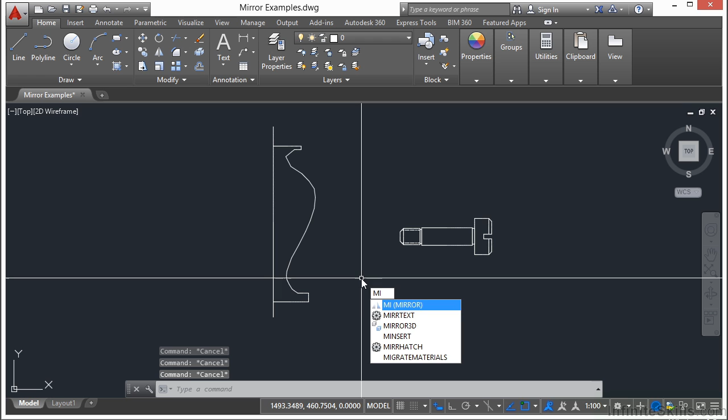So we need to start the mirror command before we can get going. Type in the word mirror, or you can type in the letters MI. Not just the letter M, which is the move command. So we want MI for mirror. Then you can come up to the Home tab on the ribbon, go to the Modify panel, and then go to the mirror command to start it.

Select your objects. We're going to select this half of the vase. You can pick one object or multiple objects. Press return, and now you have to create a mirror line. We have to pick 2 points. These points will create this imaginary line that your objects are going to be mirrored on.

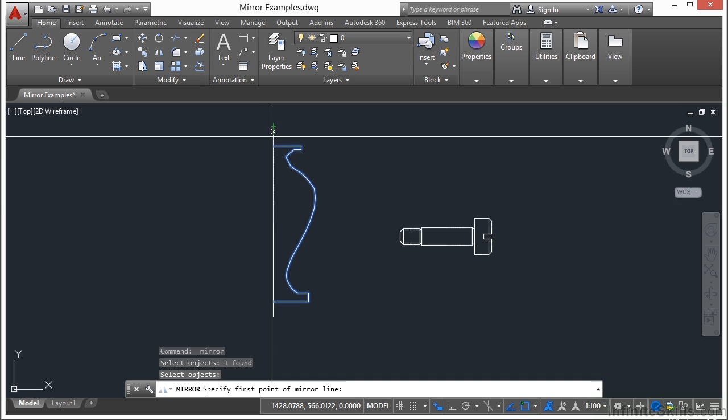In the case of the vase, I've put a construction line drawn in here already to help us see what we're doing. But you don't have to have a physical line drawn in there. Sometimes, though, it does help you get a better understanding of the process and to help better define exactly where you need to mirror about.

So in this case, I'm going to start off by selecting the top of the line. And as you can see here, I have a bit of a preview, and you can kind of see how this is all going to come into place. So I have my mirror line, which is that dash line. I just have to pick a second point.

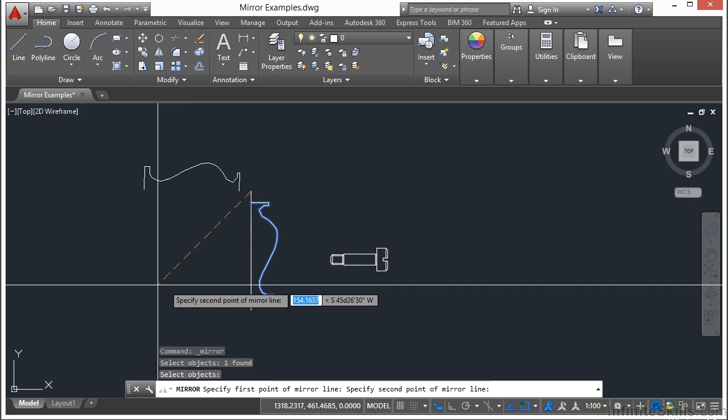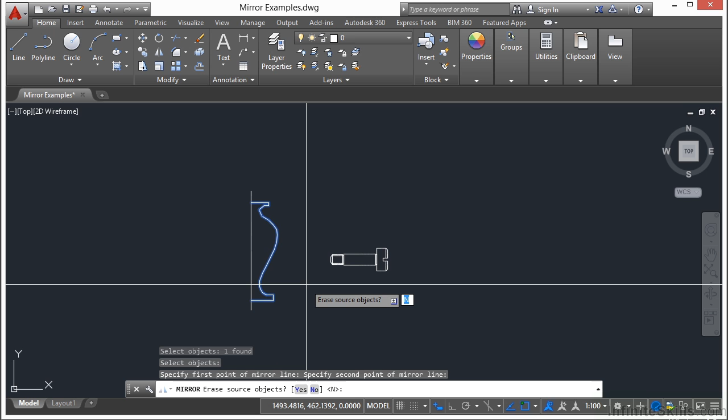You can use the mirror command to be a sort of a rotate command in a way, and I've done that before. With this little preview, I'm going to now pick somewhere else along this line. And now you're given an option: if I want to erase the source object, that means this right half that I've selected will be gone. I'm going to say no because I want to create my entire vase and make sure it's symmetrical. Just press enter, and here you go.

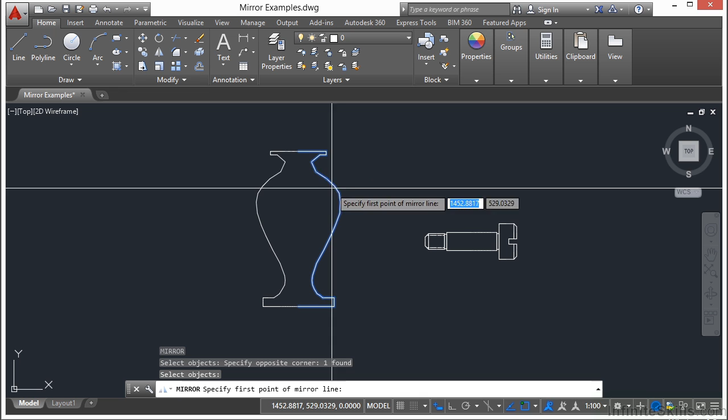Now if I select that line and delete it, you can get a better look. There's a vase and it's completely symmetrical. Now if I start the mirror line command again and select one of these halves, press enter, I can pick anywhere that I want, and it's going to mirror my object for me. Remember, I can turn on ortho, and that will help me lock in my line work to be completely vertical.

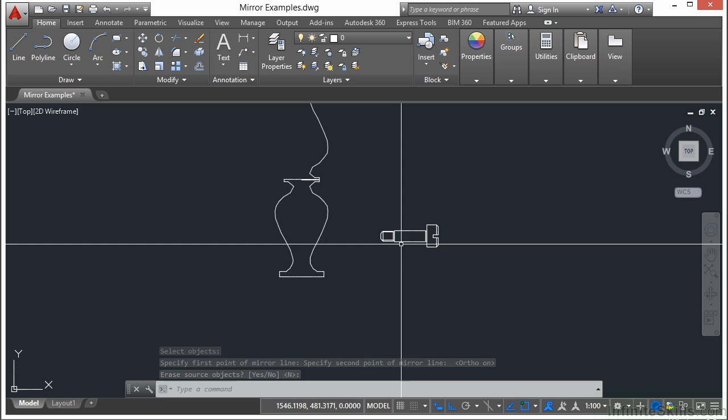And this will give you a few different options. So let's take a look here at this shoulder bolt or screw. This time I'm going to use the erase option. So I want the head of the bolt to be over here on the left.

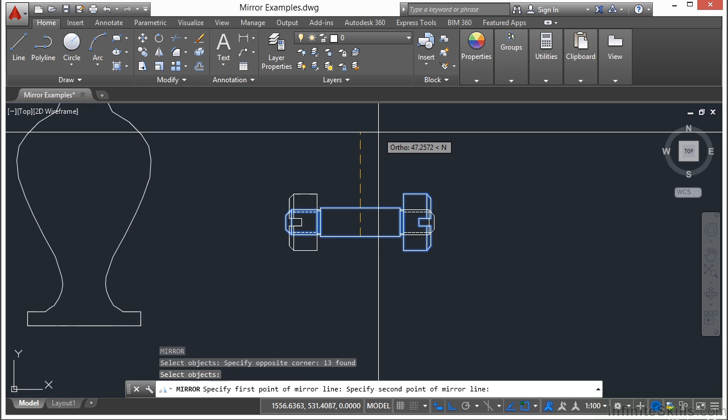So I'm going to start the mirror command. I'm going to select all of these objects, press return, and I'm going to just pick the midpoint of this line. My ortho is on right now, so I can just come straight up like this, and go up to the top. Now I'm going to tell it yes to erase the source objects. And there you go. So I did a kind of rotation with the mirror command—I just flipped it over. My old bolt is gone, and now my new one is facing the proper way.